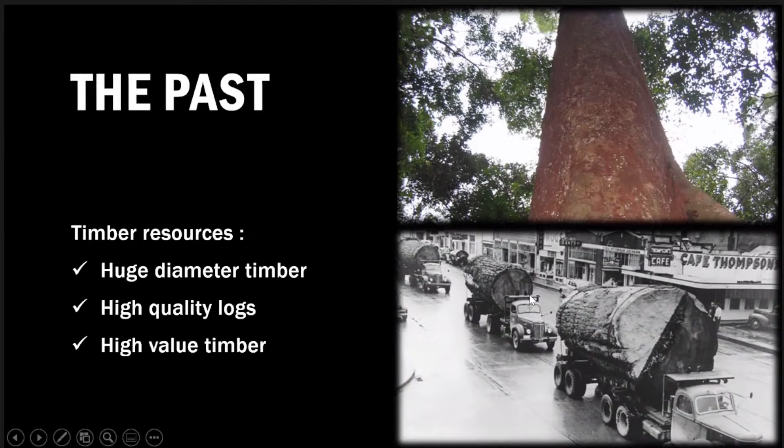And there were various timber resources you could find at that time. There was no limit to the number of timbers - you could find any species you wanted, anytime you could find the timber resource.

And then the technology, of course, was at the level of IR2 at that time. The technology was very conventional - some still manual, combined with somewhat modern technology, but it depends on the country. I think conventional, manual technology is still applicable depending on where you are or what kind of technology or machine you're using.

And even though the technology was not advanced, it could still produce a lot of wood production.

About the present, you know - I think most of the participants have been to the forest, maybe, but recently, of course, we cannot go to the forest right now. There's a policy about the SOP and so on regarding the COVID-19 pandemic.

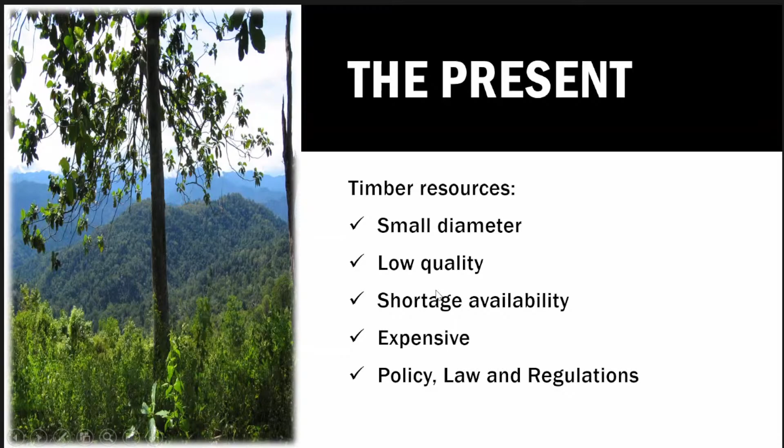Timber right now depends on where it comes from. Some species are not available anymore, called endangered species or under CITES. This is about regulation. You see now, it's a very small log.

And very short. So what do you think? If we only have short logs and small logs, we cannot do anything, because the raw material has very limited properties. Some of the timbers may be obtained from other countries, but of course the price will increase.

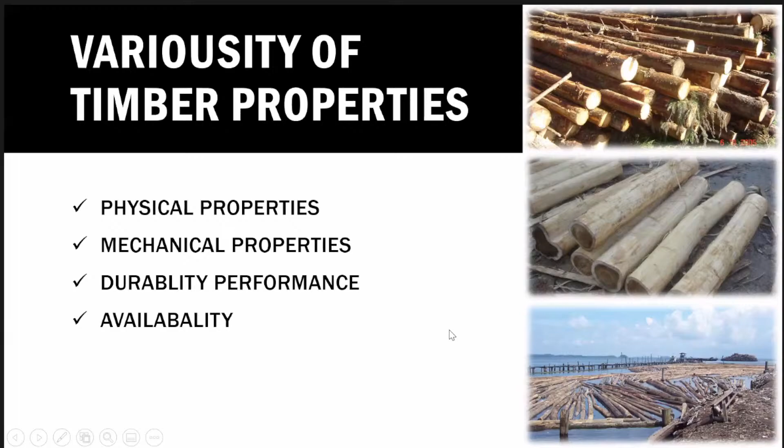In terms of timber resource management, now they implement sustainable forest management to get forest certification. Once your timber forest is certified, your timber will be marketable, and only a mill manufacturer with timber certification can process the certified timber. Some of the management includes COC, chain of custody.

It's kind of a harvesting technique using the skyline cable. This one uses only machinery, very automated machinery, to reduce or minimize the logging impact on the forest.

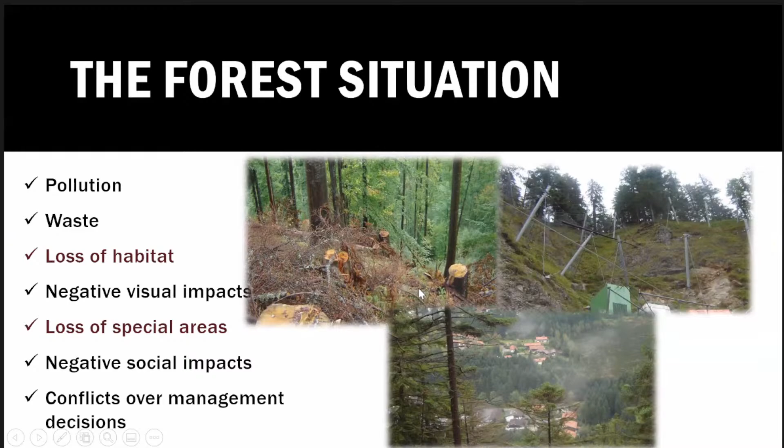So that's why there's limited raw material, especially timber. Then some other resources are usable to replace final timber products, like bricks. This one uses rice husk as a building material, because rice husk can be made into bricks or cement, and some are used for industrial raw material, for insulating material or fillers in plastic.

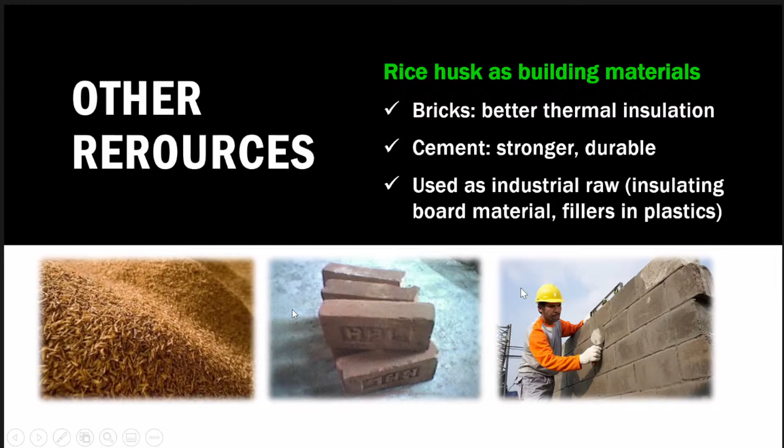And other raw material like kenaf. This one can only be considered as a potential source of raw material, producing fiber and converting it through processing into wood plastic.

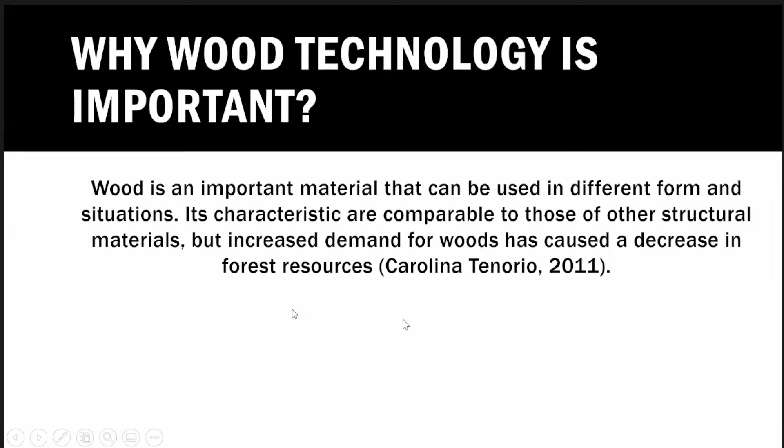So why is wood technology important? According to Carolina Tenorio, 2011, wood is an important material that can be used in different forms and situations. Its characteristics are comparable to other structural materials like steel, but increased demand for wood has caused a decrease in forest resources. That's why we need technology, because the scenario is really challenging right now.

We need technology to sustain the wood product supply. For example, around 80 cubic feet of wood is consumed each year, equal to a tree 1.5 feet in diameter and more than 103 feet tall. We need wood from a tree to produce a wood and build supply.

For other products like paper - not every human, but paper is a needed material for us. Even though we still use the internet and online resources, paper is still being used. For example, Americans use around 700 pounds of paper product per person each year, meaning there are 2 billion books, 350 million magazines, and 24 billion newspapers published in the US annually. Even with online and digital use, paper is still a relevant product.

So paper is made from timber gotten from the tree, from the forest. I think all of us still use wood products - even the toothpick, even chopstick - we use them to assist us in our daily routine.

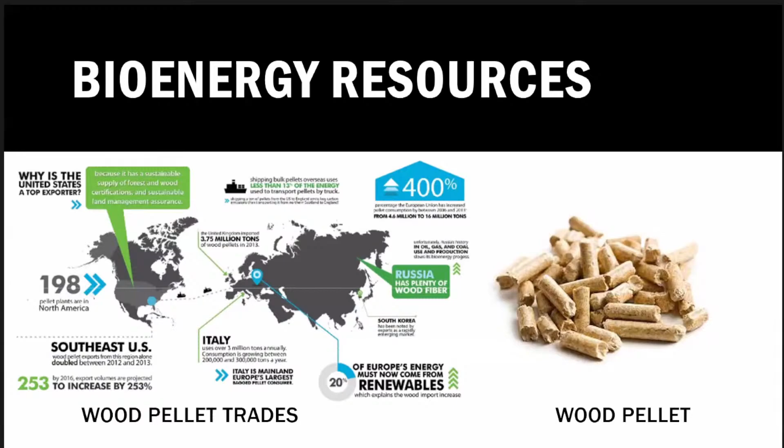So why is wood technology needed? Right now we need it for the COVID-19 pandemic. How to prevent COVID-19? You need a face mask. Not your phone - phone is maybe secondary. This one is very important for safety.

But in wood technology, why do you need technology? Because wood is one of the elements that wood product development in the wood industry really relies on. Second, technology is used to optimize the utilization of timber resources. And third, when we combine technology with wood to convert it into a new product, the wood product will be eco-friendly, a green product, and an eco-label product.

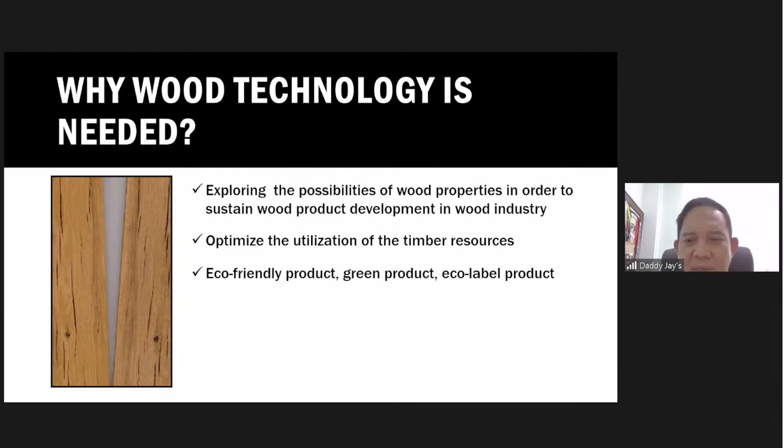This kind of product, we have to rebrand, because many parties do not agree with deforestation. But we try to prove to them that the wood we obtain does not give any negative impact. That's why we need the technology, to reduce the bad perception from other people.

And then, from wood technology, we can use a wide variety of species, lesser-known species, and using a wide range of timber grades.

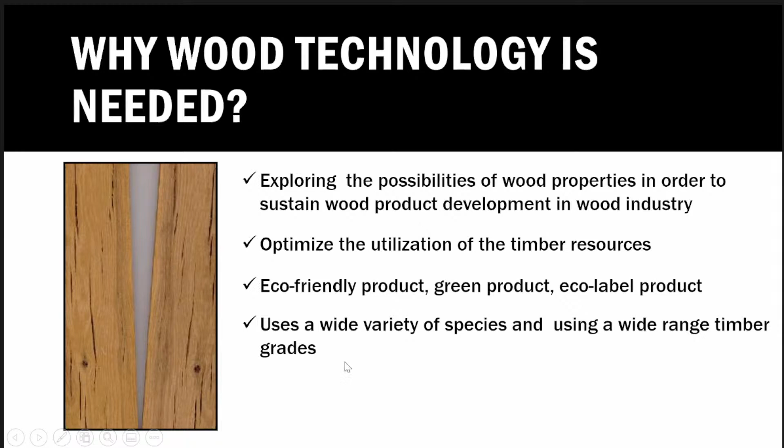Okay, there's a material we call - before I go further into our discussion today, maybe a little basic knowledge about wood. We call timber or wood a natural material that is lignocellulose. Lignocellulosic is a wood and biocomposite that consists of fibers made of lignin and cellulose.

Lignin binds the cellulose fibers together and provides rigidity to the fiber bundles. We know that lignin is plastic in nature, while cellulose is more elastic. That's the chemical composition in wood.

So in molecular form, we know this process - photosynthesis. There's a need for chlorophyll and energy from the sun to produce glucose in the timber, and the timber will grow. There's hydrolysis, which produces glucose anhydride, and then comes the polymerization process, which forms the cellulose. This is more in the realm of chemistry.

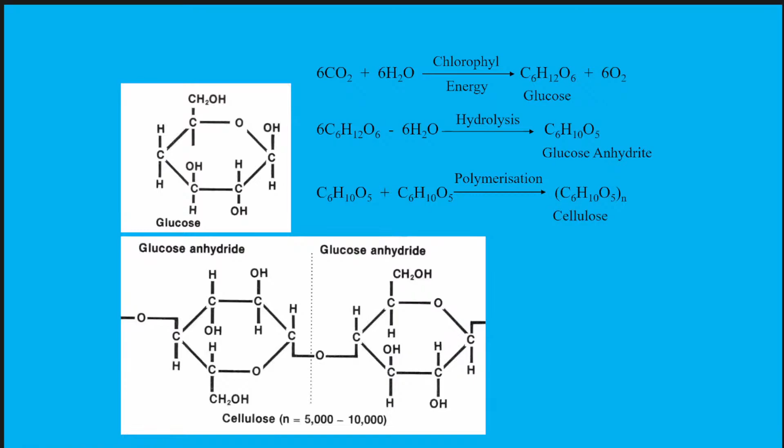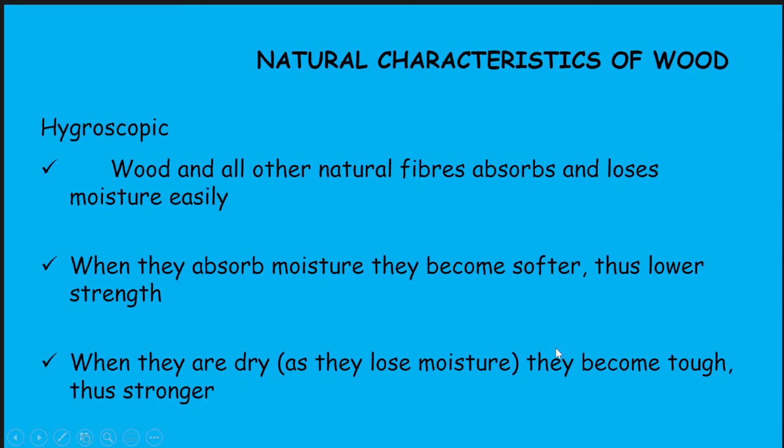But the natural characteristic of wood - the main property - is hygroscopic. Hygroscopic means wood and other natural fibers absorb and lose moisture easily. When they absorb moisture, they become softer, thus lowering strength. But when they are dry, as they lose moisture, they become tougher, thus stronger. That's why we call it hygroscopic.

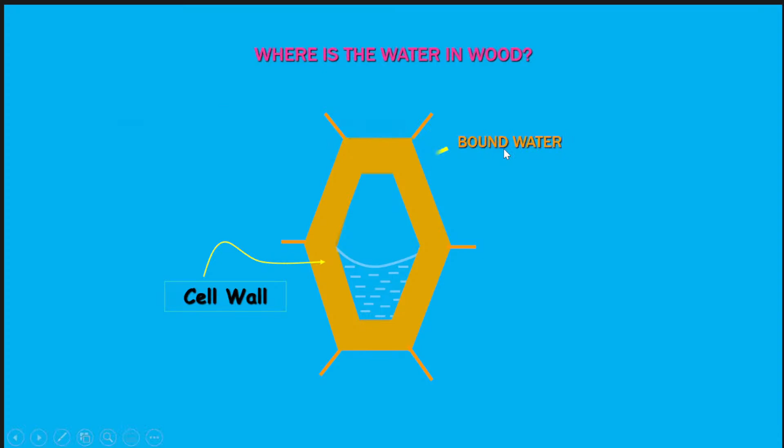So where's the water in wood? This is just a little bit of wood science - I'm not talking about wood science generally, I want to link this knowledge to why we need technology. Bound water you can find in the cell wall and lumen, and free water you can find in the lumen. So water vapor is here - that's why wood becomes hygroscopic.

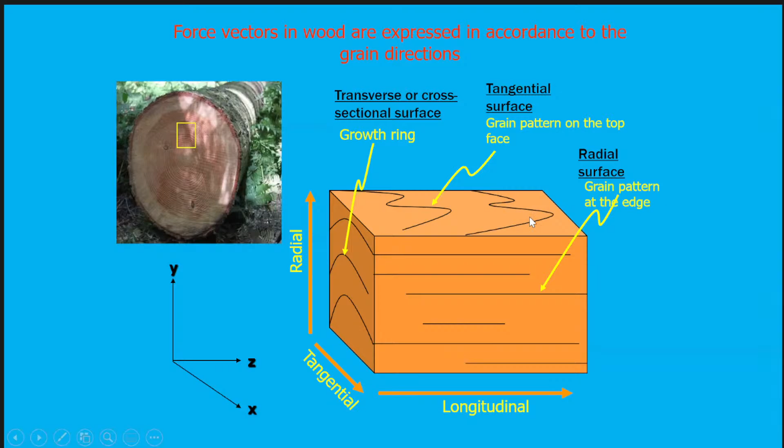So this is the 3 grain directions: radial, tangential, longitudinal - it's a round log, 3 axial directions. And you know this is a growth ring. But growth rings normally can be exhibited, or not - most species from the temperate zone can exhibit growth rings compared to tropical timbers.

How important is wood technology? Yes, it's very important, because technology will enhance wood performance by combining wood material and wood science. So without technology, wood cannot be used to its extreme potential for what we target.

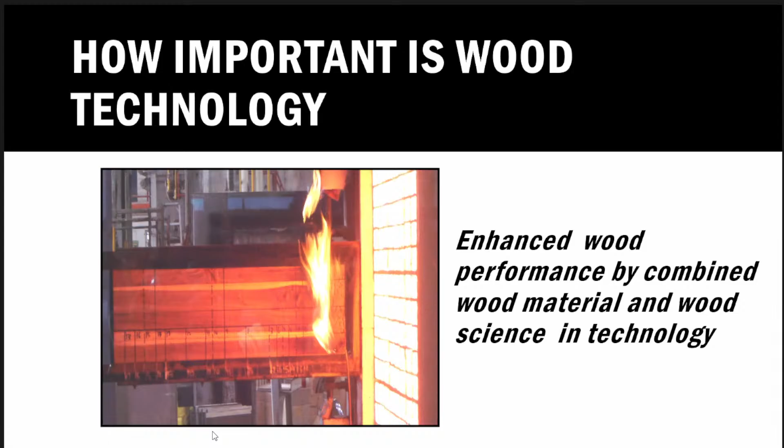So an example, a very conventional product - plywood. Plywood is one material that successfully replaced sawn timber. Because to produce sawn timber, to get let's say a 20 feet length, you need at least 20 or 30 feet logs. And if the timber has a small diameter, you cannot produce the size of sawn timber needed.

For example, 4 by 4 inch you can still obtain, but 20 by 20 inch is difficult to obtain. And sawn timber has general problems - it's not straight, and there are many defects, especially drying defects.

So plywood is one solution - not replacing 100% of sawn timber, but replacing the building material we used before, which was sawn timber. To improve building material utilization, plywood was introduced to the industry.

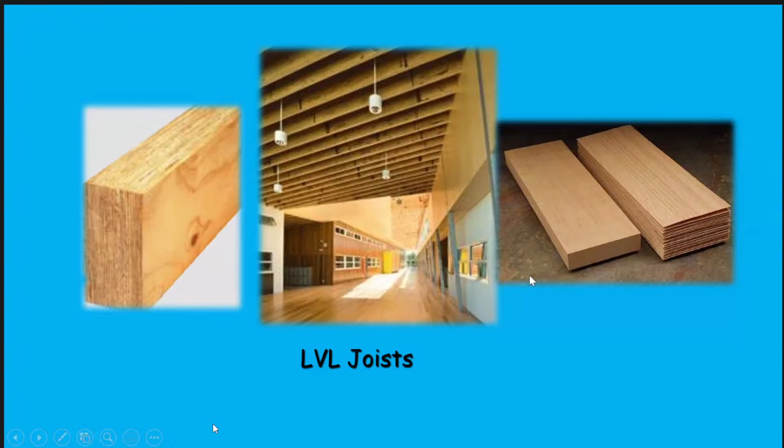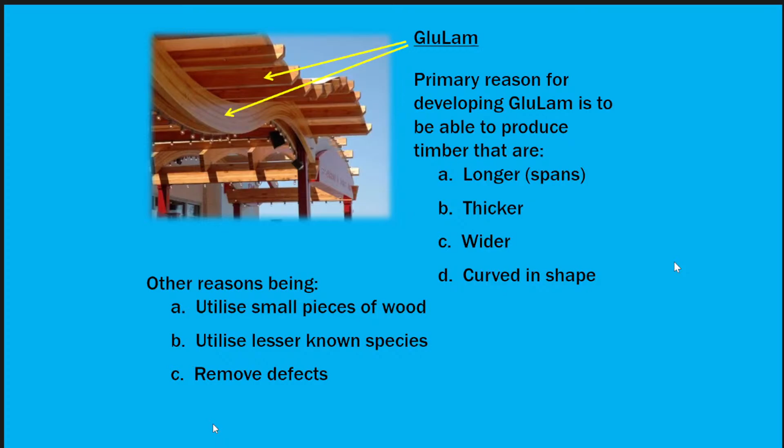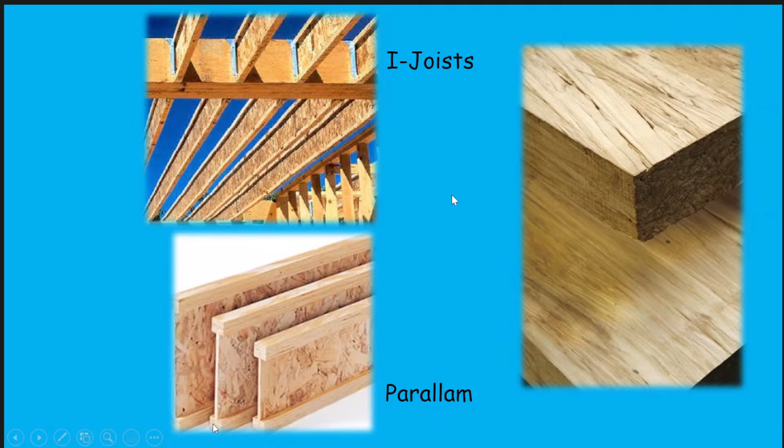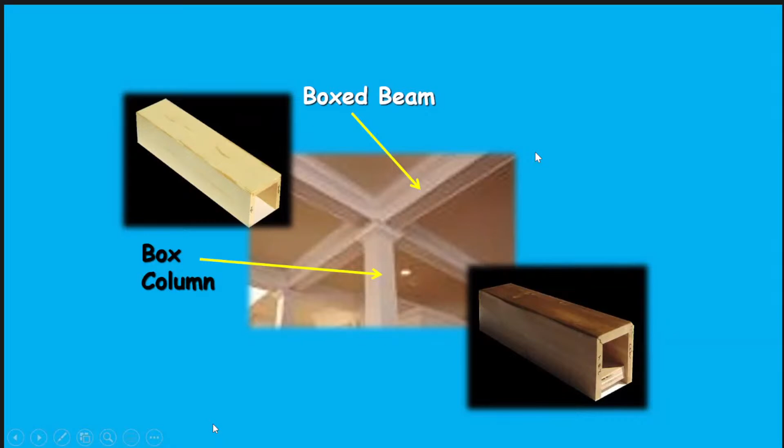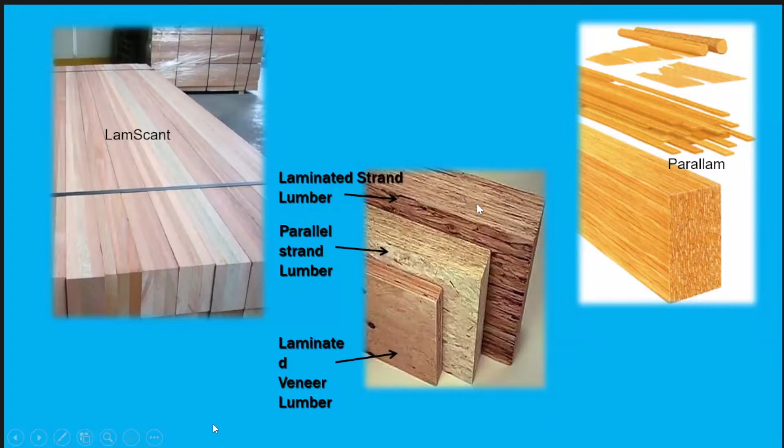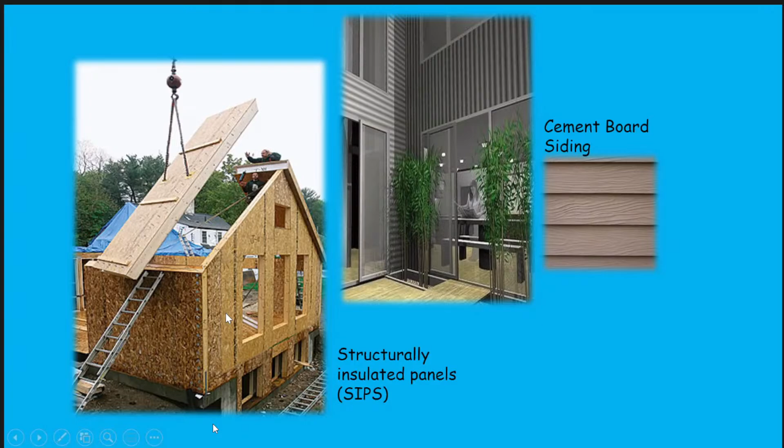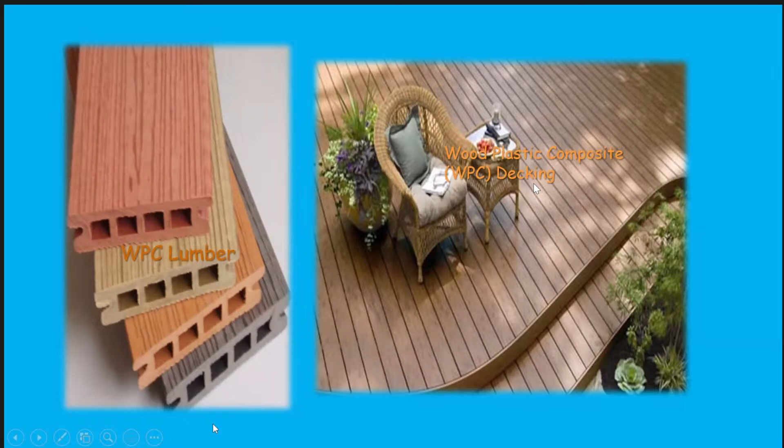It's widely used for housing development. And of course, the wood plastic composite lumber is used for decking. So all of the pictures indicate that these products are considered

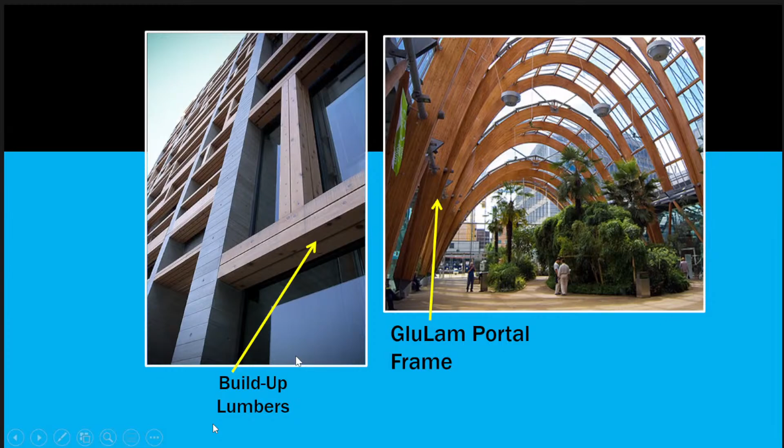This picture in the diagram shows a glulam arch frame, becoming a landmark, attractive building. And this one is built up by lumber in the building.

And for example, floor panel, compared to conventional flooring or parquet flooring, there's only 1, 2, or 3 layers compared to the floor panel right now, which has a UV lacquer layer.

The properties are anti-resistant to scratch. There's a 3.2mm surface timber veneer made from hardwood. This one is cross-laminated pieces of sawn timber made from Hevea hardwood and timber veneer.

So all this combination we call engineered wood product. When we talk about engineered wood product, of course it will reflect the quality.

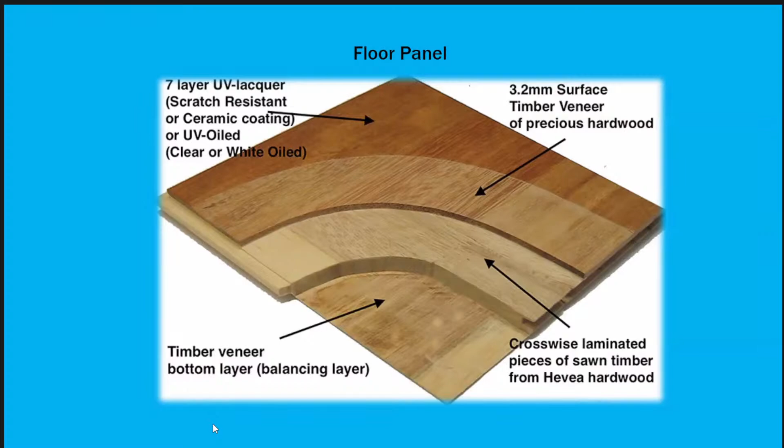This one is composite wall system. In the composite wall system, we can see there's wood here, OSB oriented strand board made from wood, with the function of racking, vapor control and air tightness.

Flexible wood fiber insulation between studs, then insulating wood fiber sheathing. This one is a drained and ventilated cavity, and the outer layer is horizontal weatherboarding fixed to battens.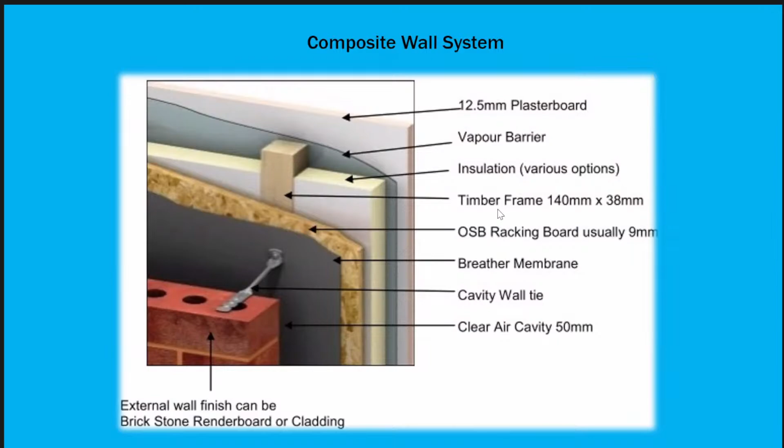This kind of composite wall system is very widely used, especially to protect from hot weather, because its function of course is insulation.

And, any question? Not yet so far, I think. Okay. All right. Yeah, because I hear from them, all right, okay. Thank you. Okay, so can I proceed? Yes, just continue.

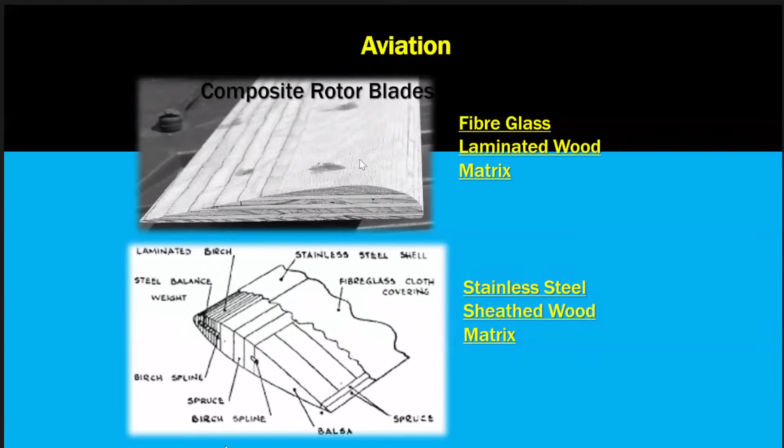Finding others' usage of wood, of course, in aviation - composite rotor. You may not be aware that the aeroplane you board is made from a material made from wood. For example, this composite rotor blade is made from fiberglass laminated wood matrix.

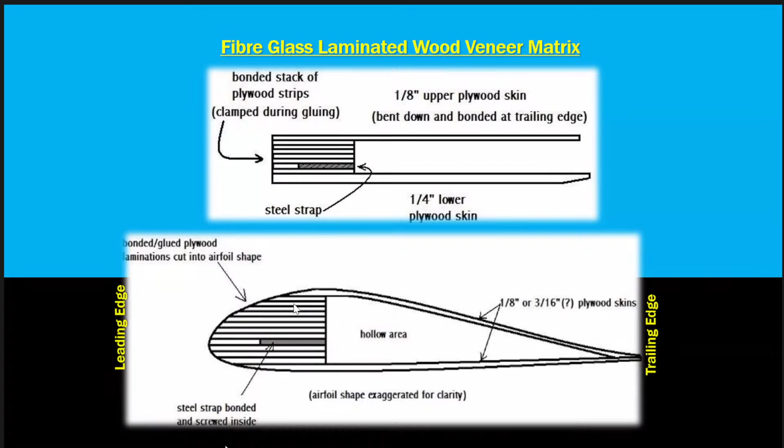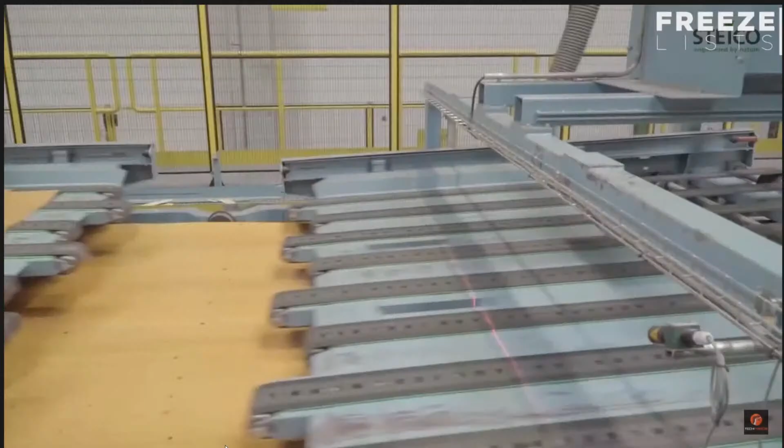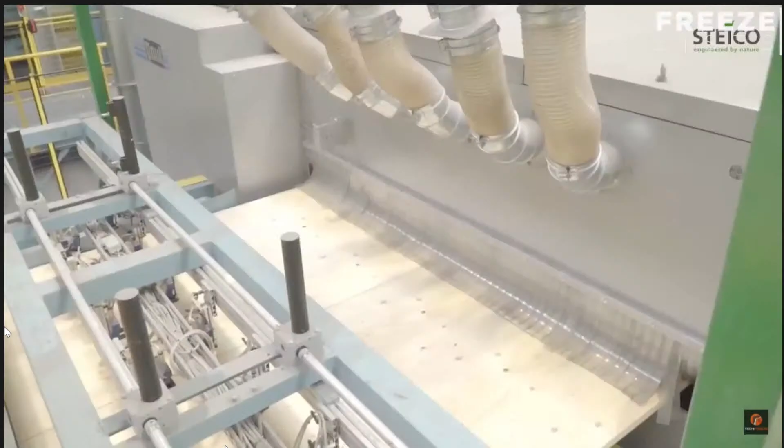This one is for the plywood manufacturer. You can see there's automated machinery - no manual process like before, everything is automated. So from plywood small size 4x8, you can produce a big, huge size. This one is veneer.

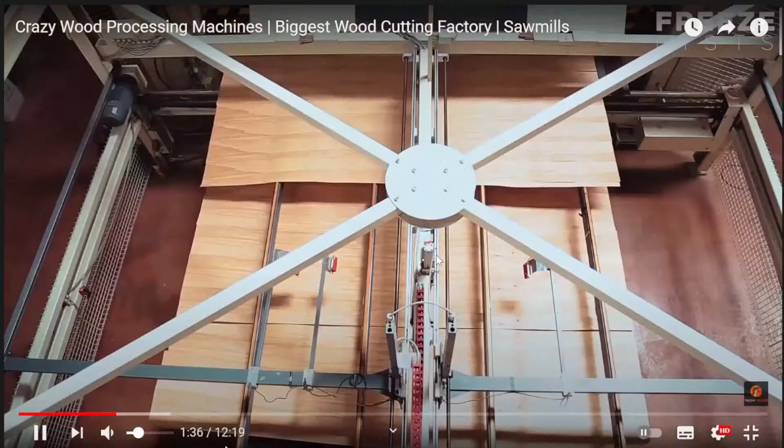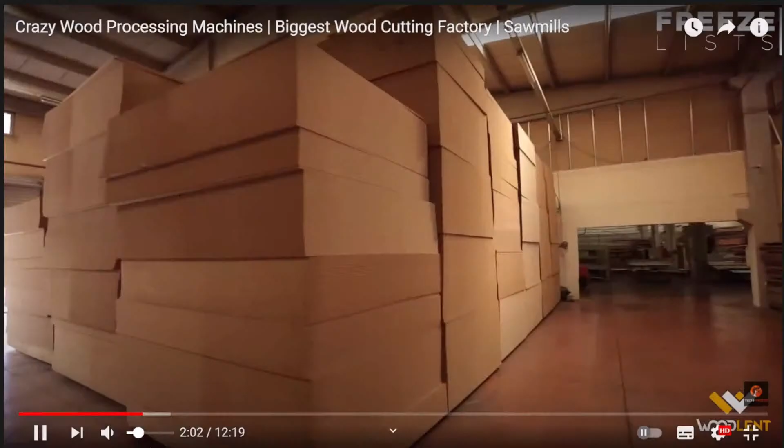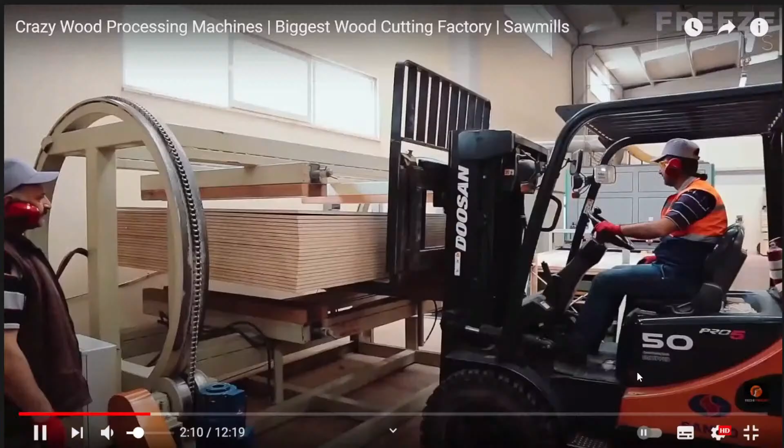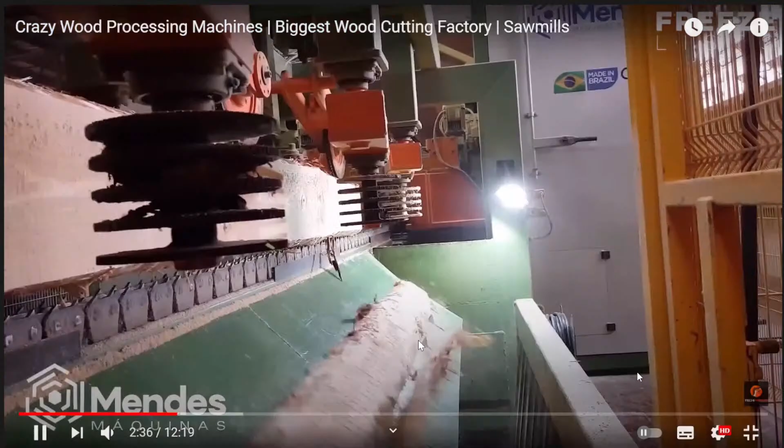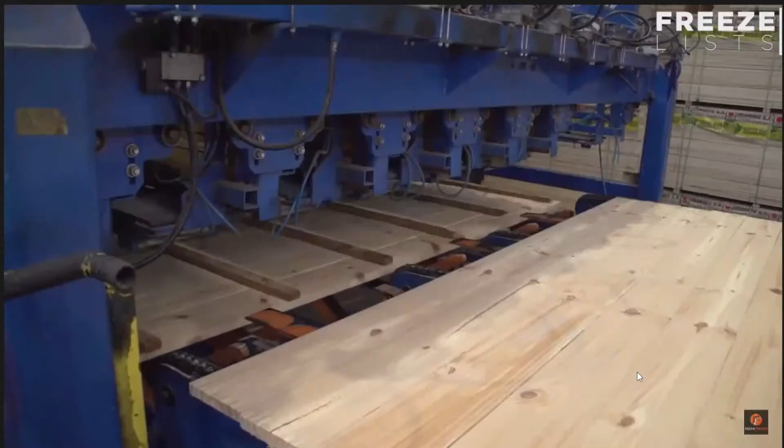This is laser cutting, laser marking, and after the debugging process, removing all the bugs. So after the billet is cut into the specific size, it will be sent to the jointing process.

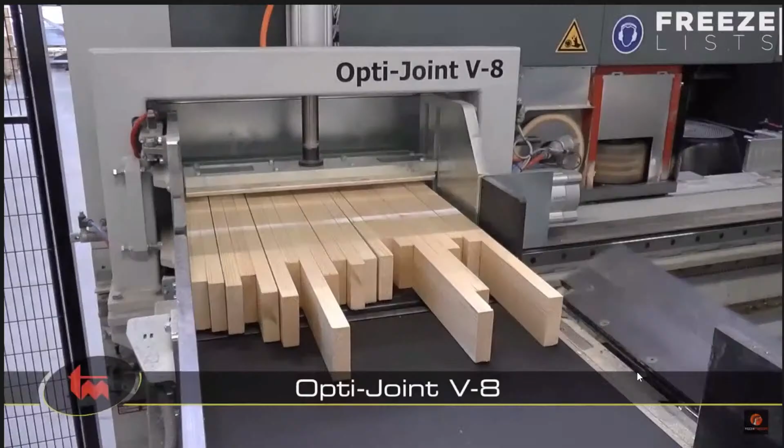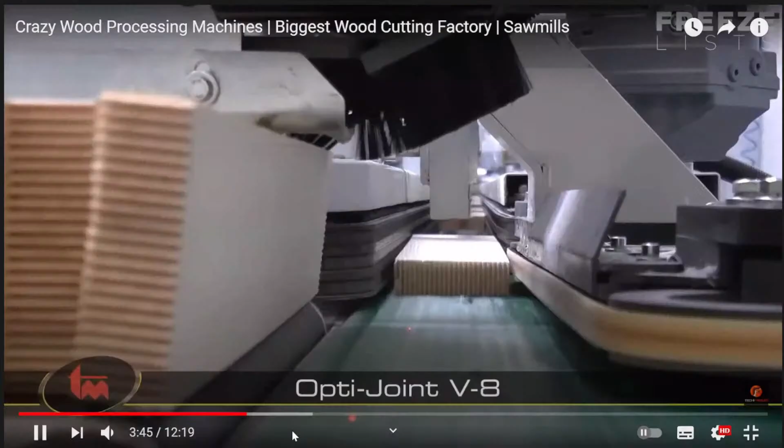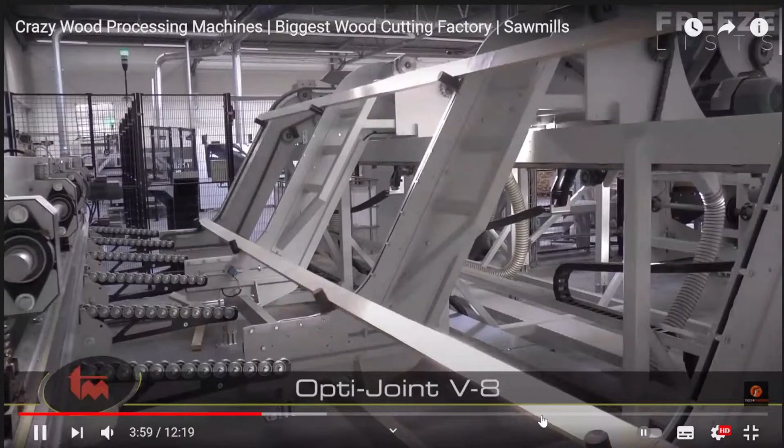This one is called Opti-Joint - small wood pieces joined together. This one is called finger joint. See how precise the machine is to process the timber - this is very automated cutting, very flat.

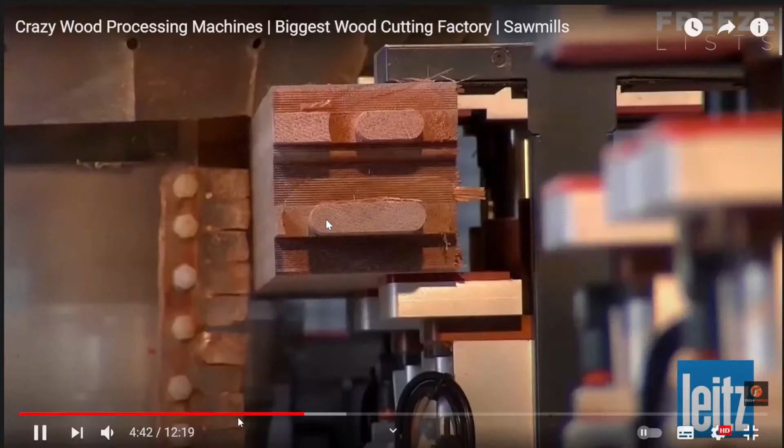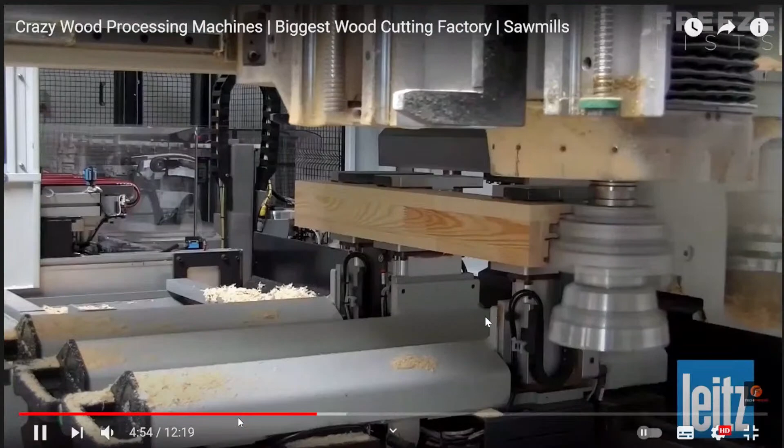This kind of technology helps reduce the waste of timber. When the technology of the machine improves, it reduces timber waste and helps us in terms of waste management. This is a molding - from small logs, small pieces joined together and processed to become one product.

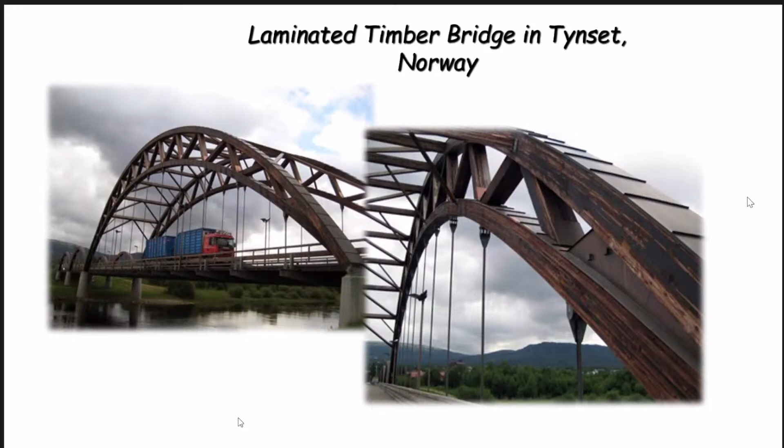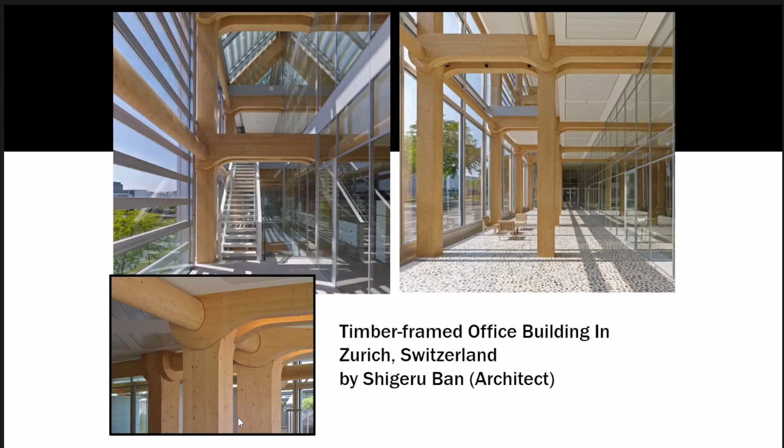This kind can also be timber frame construction from the tree - it's also a combination with logs and LVL.

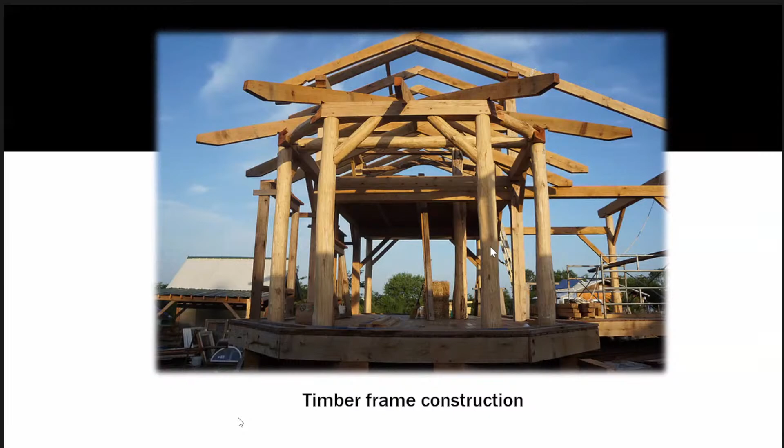I think Dr. Tommy maybe been there in Tokyo campus. Yeah, I hope this picture is exactly real. Yeah, this a timber slats. The architect is Kengo Kuma, and as I said, Kengo, yeah, okay, so one also architect from Kengo Kuma.

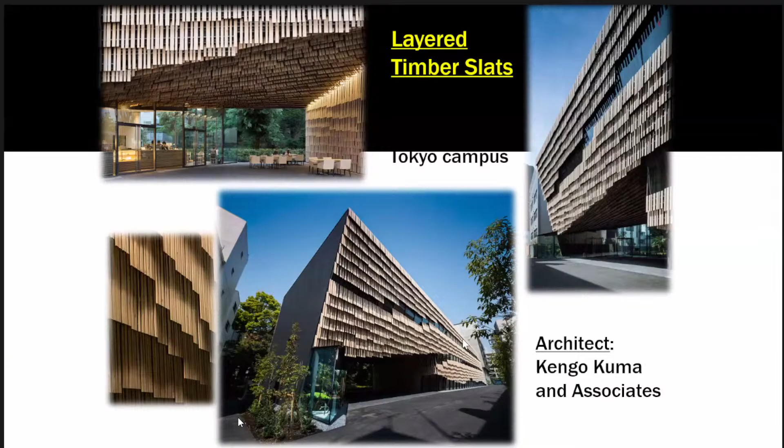It also can be seen in Ontario, in Credit Valley Hospital, for cancer center treatment, because we know that all the patients need something different that really improves or helps their psychology. So wood is a good choice for them. That's why Credit Valley Hospital uses wood material as a building component for their regional cancer center.

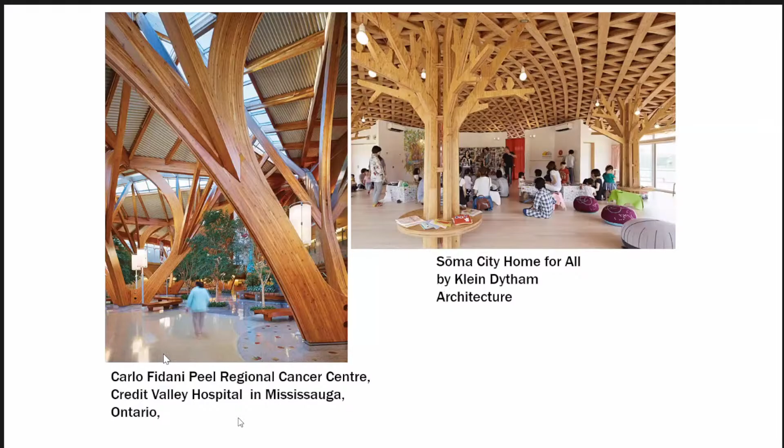This one is during Malaysian Expo 2015. They designed this kind of showroom, a pavilion, in Milan. So all is made from timber.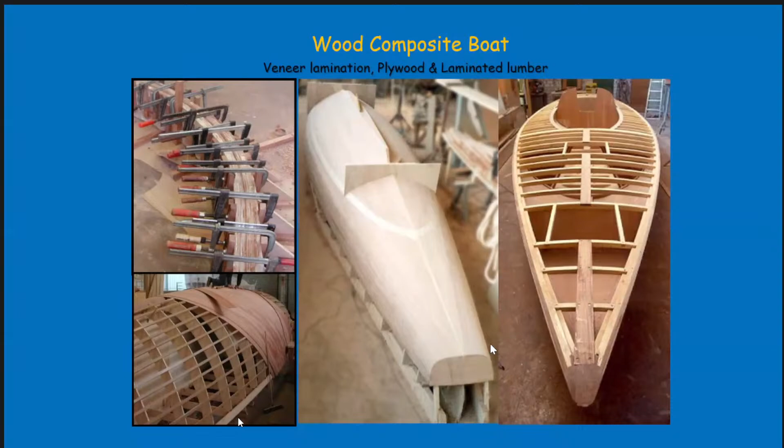Okay, this one I share about timber architecture from David Daniel, last year, about the 10 benefits of wood-based design. While we talk about wood technology, of course, the designer, the architect, also needs to know the basic knowledge of wood before they combine it with the design, and the technology should know the basic knowledge about timber.

So from that, Mr. David Daniel suggests there are 10 benefits of wood-based design. Of course, the first is this timber frame home from Egeon Architecten. Very unique, it's a house, this one.

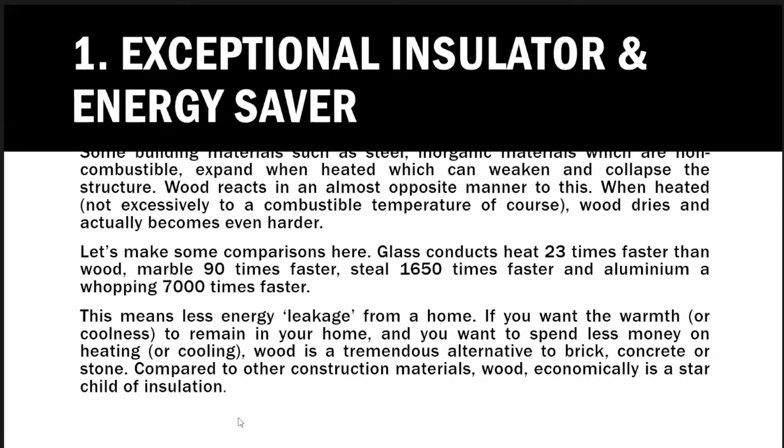Exceptional insulator and energy saver. Meaning to say that we know timber is a non-conductor material, right? And we know that as a non-conductor material, wood helps prevent heat from coming into your building or house. And in temperate countries, wood is very important during the winter season, which has very extreme temperature, especially for steel material, which will become frozen and fragile compared to wood.

So this one is about why using wood saves on heating bills, and using wooden frame structure is safe. The fact is wood actually does contract slightly when air humidity drops, but this won't affect construction as most fresh climate humidity doesn't drop below that level.

And then, save money, quick to build. Like Albert Einstein said, people love chopping wood; in this activity one immediately sees results. We can see that 100 cubic meter wooden houses can be manufactured or built within 7 days. With technology, of course, it's not impossible.

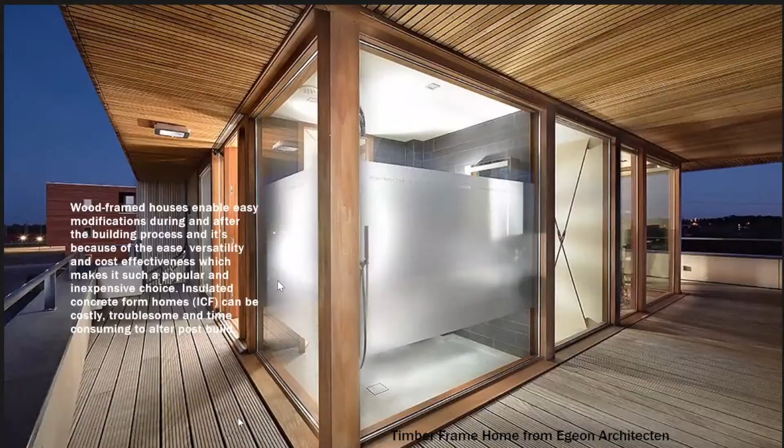Okay, this one shows wood frame houses, enabling easy modification. So this is glass, meaning you don't need to use light from electricity, you just can get light from the sun, maybe.

So of course, wood itself is very environmentally friendly. It's sustainable, renewable, and environmentally friendly, because wooden structure absorbs and stores atmospheric carbon dioxide, and wood is carbon neutral.

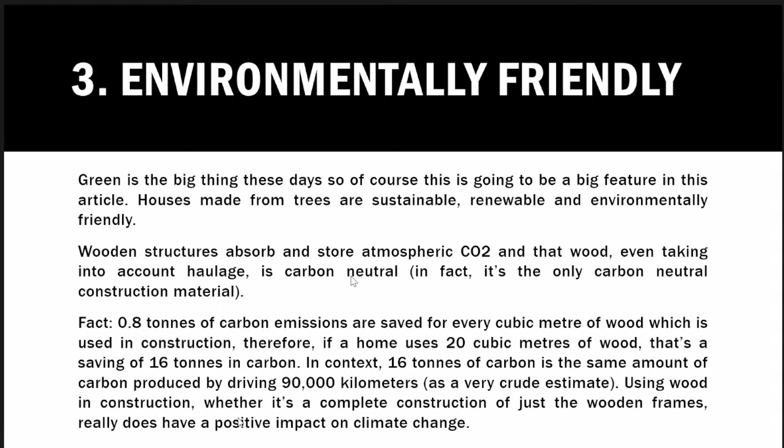And of course, from the aesthetic value, wood is very versatile and aesthetically delightful, because there's around 500 different woods to choose from. So the design depends on the desire or taste of the user.

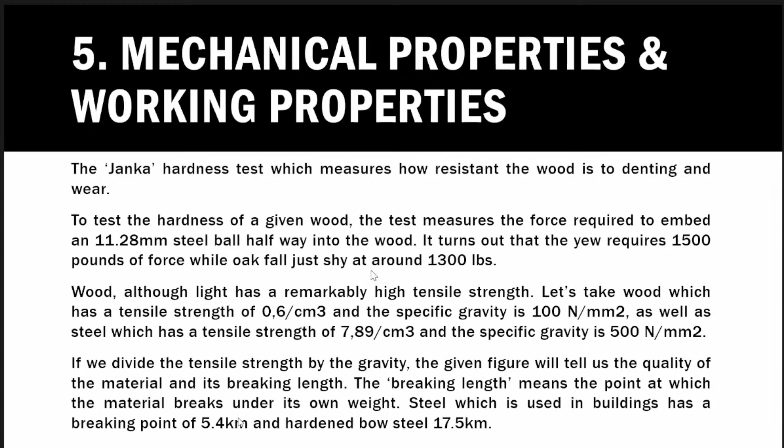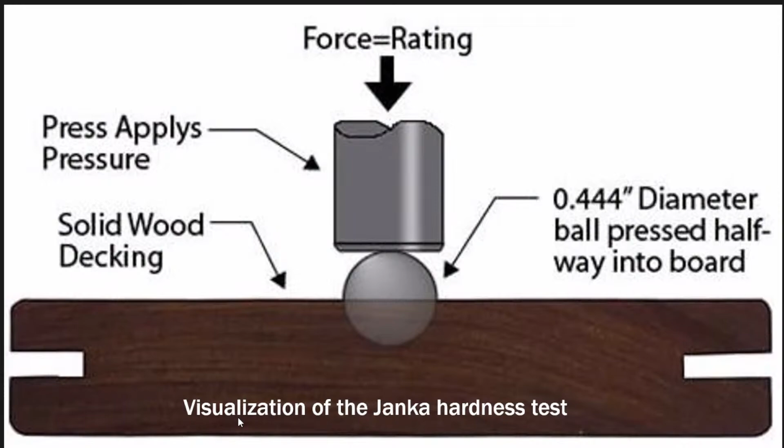Then there's a very important mechanical properties, which indicate the performance or the strength of the timber. This is one of the mechanical testing, called hardness testing, to determine whether the timber is qualified to be a construction material or not. We know there's 3 or 4 categories of timber: low density, medium density, and high density. When compared to the strength of steel, there's a bit of a difference.

And we know that wood is easy to maintain and repair, compared to steel or other materials.

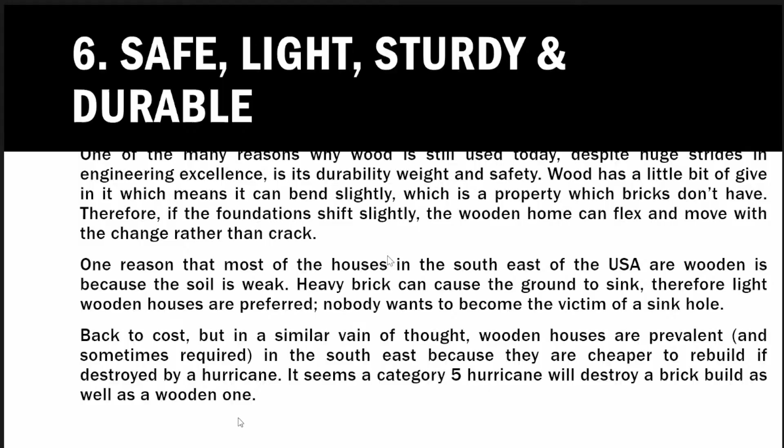The next benefit of using wood is that it's safe, light, sturdy, and durable. Until now, wooden houses are prevalent, meaning it's more cheaper compared to houses made from concrete material. For example, light wooden structure from mesh design and project - this is one benefit of using wood as a construction material or housing material or other purpose.

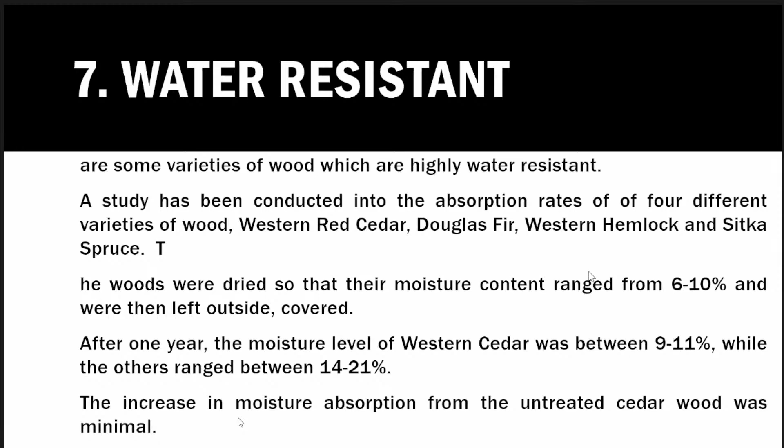Of course, it's also water resistant. Some species like red cedar have a moisture content ranging from 6 to 10%, and the timber does not absorb water or moisture even though the equilibrium moisture content, EMC, may increase.

This study showed some wood has a tendency to absorb moisture. I think it's a housing sample study to investigate whether houses made from wood absorb moisture or not. Of course it will absorb, but maybe it doesn't affect the stability or dimensional stability.

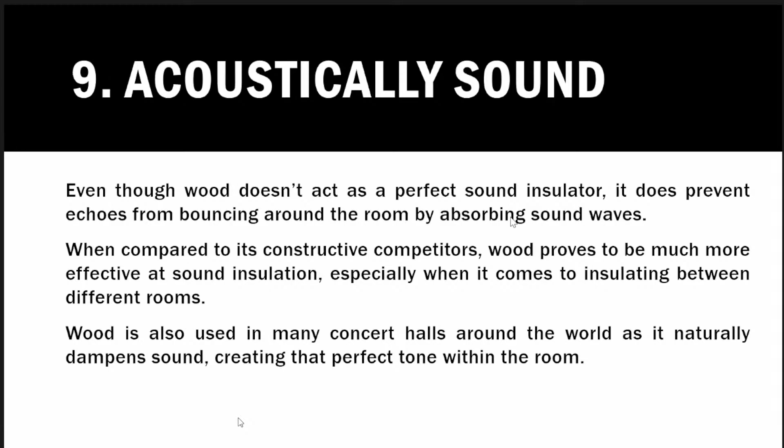Of course, this is another benefit of timber as a building material: acoustically sound, more soundproof, and absorbing sound waves, especially when the hall is very huge, like a concert hall. If made from steel or cement or concrete, there will be noisy, annoying bouncing sound waves. But if made from wood, wood has acoustic properties, so the noising sound will not occur.

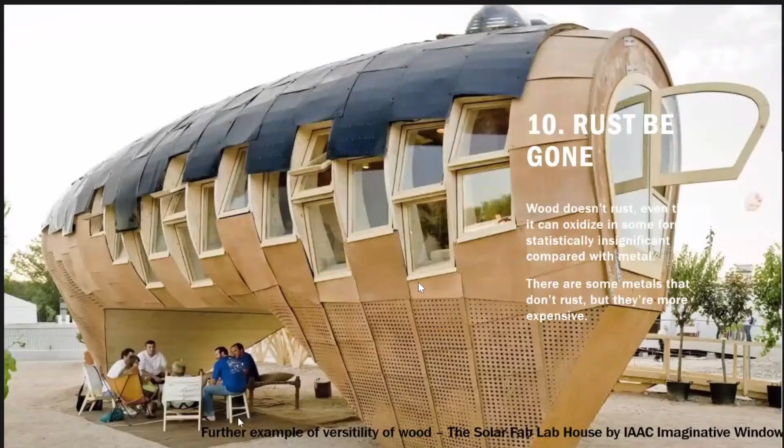Okay, the final one - why do we need wood? Of course, wood will never rust, compared to metal, wood doesn't rust, and we can find it cheaper than metal.

All right, I think I've ended my slide. Thank you all, hoping it will improve your knowledge about wood technology and some of the wood products that are really relevant to our life right now. If you have any question, you can ask anytime. All right, thank you.